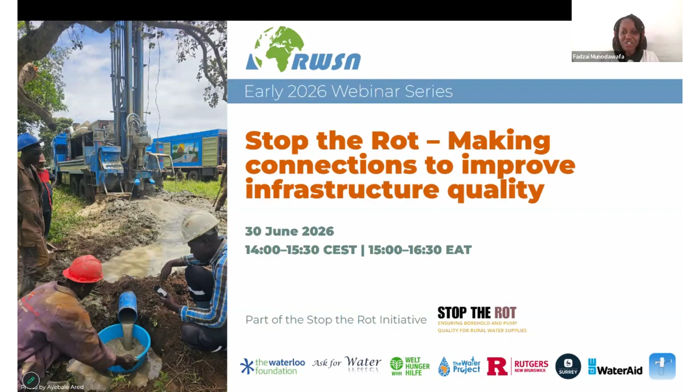So for our agenda for today, we'll have our welcome and housekeeping, which has already been done. We'll then have setting the scene from Kirsten, who is going to give us a journey of the Stop the Rot up to today. And then we'll move on to pitches for the World Café. I'm really excited about this bit. I'll tell you more about it as we go on, but we're going to have a World Café and we'll have pitches from specialists in 5 different groups.

So we'll have a pitch on borehole design, drilling, and construction. Secondly, seasonality of drilling and hand pump operations. Thirdly, hand pump upgrades and design improvements. Fourth, hand pump corrosion and prevention. Fifth, hand pump supply chains. I'll also then introduce the specialists as we go forward. Next on our agenda, we'll then have the World Café round 1. We'll have the World Café round 2. And to close it off, we'll have key takeaways and the closing session of the agenda.

So I'm honored to be the one who is moderating this particular webinar, and it's a webinar with a difference. So the Stop the Rot, since it started in 2021, has brought champions together who are striving to improve the quality of boreholes and hand pumps. In this different, exciting, and highly consultative World Café sort of webinar, you will have the opportunity to directly engage with specialists and researchers on borehole design, drilling and construction, seasonality of drilling and hand pump operations, hand pump upgrades and design improvements, hand pump corrosion prevention, and hand pump supply chains.

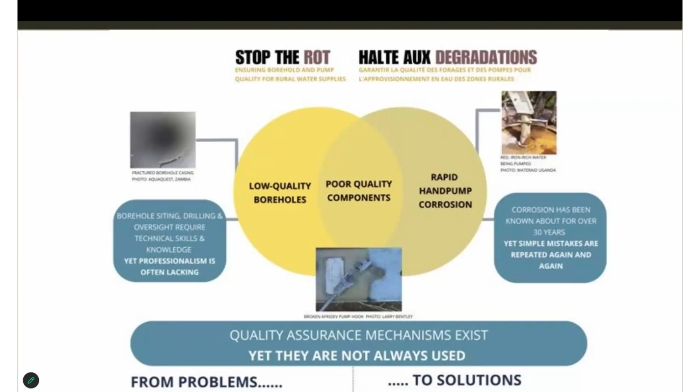That although there are quality assurance mechanisms for hand pump components, they're not always used. And missing from this poster, but part of the webinar, there are also hand pump design improvements that can make a difference. And last, but by no means least, is the fact that hand pump corrosion has been known for decades, but simple mistakes are being repeated over and over again. Stop the Rot is trying to move from such problems towards solutions.

Now, for sure, some of you are thinking about what's missing from this poster, like why are they not talking about services? Why are they not talking about finance? But just to say that our focus is really on the technical components and what feeds into those technical issues, quality issues. So everybody who's part of the initiative is aware of the importance of maintenance, of operational services, but our focus is to really make sure that the infrastructure, including the spare parts, are of sufficient quality to be maintained. And we are talking to other networks, including Agenda for Change, and we've got a blog just starting with them.

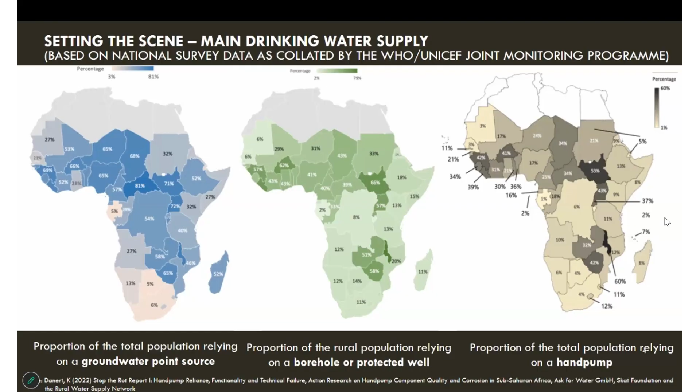So probably there are about 0.7 million, 700,000 hand pumps in Africa, and on average, 1 in 5 people rely on a hand pump, with about another 1 in 5 still relying on unmanaged, unsafe, unprotected water supplies.

So if we go to the next slide, I've really had the pleasure to be able to spend a really large proportion of my working life on one problem that at the same time encompasses many different issues. And that problem, or the challenge if you prefer, requires not only the dedication of people and organizations, but really needs us to learn from each other and to challenge each other, to ask questions continuously. And like the Celtic knotwork, there's no endpoint.

And so after almost 20 years of really looking at boreholes and professionalism and working in the tangle of drilling professionalism, I'm really delighted to see Fadzai, in fact, our chair for this webinar, as the theme lead for this topic. And Fadzai has become its custodian and champion, charting new directions.

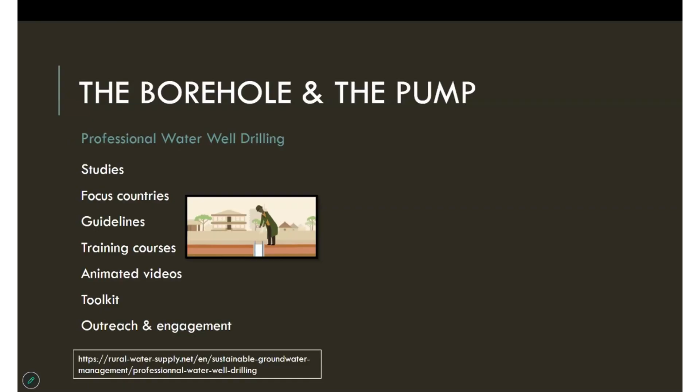And thanks to the support of the Waterloo Foundation, in 2021, I was able to shift my attention towards hand pumps, something that I thought had been largely neglected for some time. But I found many others that are interested in this topic, and many of those have joined the Stop the Rot action group already. And so in my backpack, I take the learnings from the work on professional drilling alongside new ideas, and perhaps more importantly, many new people on to Stop the Rot and looking more closely at hand pumps. And that brings me to this webinar.

If you can go one more slide, please. Thank you.

In the polls from previous Stop the Rot webinars, and also the recent RWSN member survey, you've been asking for more interaction with each other and with specialists. And so that's what this webinar is all about, to give you a space to interact, to learn from each other, and to challenge each other, and even become a champion for improving the quality of the rural water supply infrastructure. So some of the Stop the Rot Action Group members are already here and part of this great panel, and we've got a few others who've joined to really look at 5 important issues for you to engage with.

Fadzai is going to present them to you, but before she does that, I just want to make a couple of points: what we have on today's webinar are not all the issues that we need to think about. And secondly, these issues interconnect. So for example, the biofouling of boreholes will affect hand pump corrosion, or hand pump upgrades and design improvements will affect the supply chain. And seasonality is also an issue in borehole design. Or changes to the supply chain may reduce hand pump corrosion.

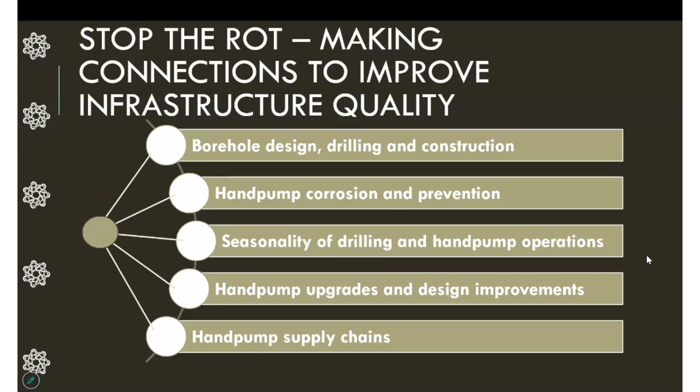Thank you very much, Kirsten, for that amazing journey. Yet it's a journey that is actually empowering people to action. What caught my attention is that the issue of corrosion has been known for so many years. But what's inspiring is that Stop the Rot, to me, is a movement for solutions. So I do hope that each and every one of you is already a champion or will become a champion at the end of this webinar. Kirsten is already the lead champion and she's looking for more champions to join in.

So moving on, this webinar is a webinar with a difference. We will have interactions and discussions with specialists for the different topics we mentioned earlier. It follows the World Café format, and there will be 5 breakout rooms where we'll have live discussions and questions with the specialists. Imagine you are in a conference room and there are several booths that you can walk around and have one-to-one discussions with specialists. That's what we want to bring, but on a virtual platform. And we'll have 2 sessions. Maybe we can move to the next slide.

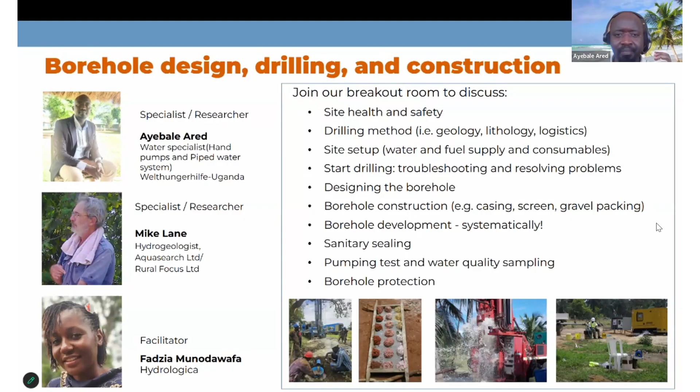Thank you so much, Ayebale. The next breakout room will be about seasonality of drilling and hand pump operations, and I invite Catherine to present the pitch. Thanks, Fadzai. Hi, everyone. I'm introducing Breakout Room 2 on behalf of my colleagues, Joan Were and Brian Otieno, who are joining from Kakamega in Western Kenya. We work together at the Water Project, and we're involved in the full life cycle of boreholes and hand pumps, from pre-drilling all the way through sustained O&M. Through this work, we've learned how our operations and activities are affected by seasonality, and in response we've adapted our work to address these seasonal fluctuations and consider them in our processes and protocols.

So please join us in Breakout Room 2 to discuss what we've learned, what we've implemented, and most importantly, share your own experience with the effects of seasonality on drilling and O&M. We look forward to our conversation and continuing to learn together in Breakout Room 2.

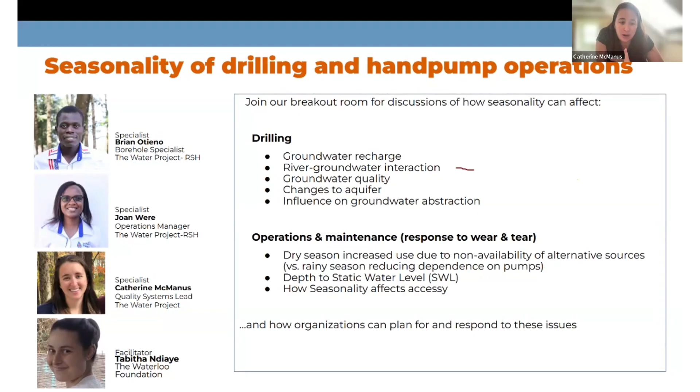Thank you. Thank you so much. Fadzai, are you able to speak now? Is your connectivity back? Yes, thank you so much, Aline. Thank you very much, Catherine, for your invitation to Group 2.

We move on to the pitch for Group 3 or Room 3. I'd like to invite Sandy Pollack. Sandy Pollack is a mechanical engineer working on industrial machinery problems, head of Poldaw Designs in the UK, and he's experienced with technology that is appropriate for wind pumps and hand pumps since 1980. Welcome, Sandy Pollack, and please tell us what you would want to discuss in Group 3.

Hello, we invite you to discuss the controversial hypothesis that deep well hand pump breakdowns can be largely eliminated by introducing redesigned and improved components. We have been carrying out service trials on India Mark IIs and Afridevs with upgraded components over the last 5 years. Join us for an interesting exchange of opinions, ideas, and experience.

I am Sandy Pollack of Poldaw Designs UK. We work with WaterAid Uganda and with Design Outreach USA and with Fisherman's Rest Madzi Alipo Project Malawi. My 3 colleagues today are Alfred Odokonyero of WaterAid Uganda and Harlod Zaunda and Victor of Madzi Alipo Project Malawi. We look forward to your thoughts and questions. Thank you.

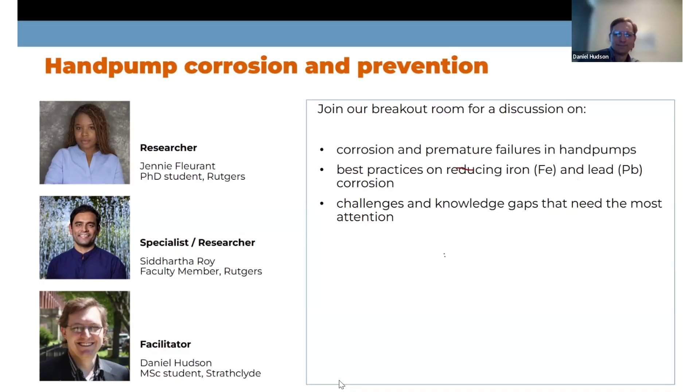Thank you very much, Daniel, for that. We're going to quickly move on to the last and not the least, group 5. I will hand over to Donya so she can tell us more about what they want to discuss in group 5. I will share, but I think Mahilet would do much better justice to this breakout room overview. Mahilet, over to you. Thank you very much. Hello, everyone. My name is Mahilet Berryhoon. I'm a second-year PhD student at the University of Surrey who researches hand pump supply chains, especially as it relates to quality assurance.

So please do join our breakout room for a discussion on supply chain-related challenges that have persisted in the hand pump sector, looking at drivers of quality issues and some different perspectives from different stakeholders on what drives quality issues in the hand pump market, as well as looking at the role of partnership, trust, procurement, and power, and how that all feeds into the decisions that are being made within the hand pump supply chain. So please do join the breakout room because I would love to hear from you, your perspective, regardless of what kind of stakeholder you are. Thank you very much.